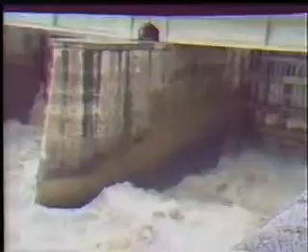Today we are going to deal with the effect of viscosity on fluid flow, and explain the basic concepts of laminar flow, turbulent flow, critical velocity, and Reynolds number, and its application in fluid flow problems.

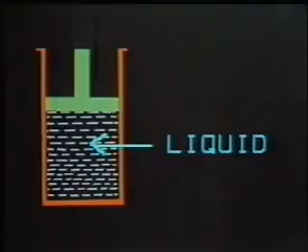All fluids existing in nature, both gases and liquids, are viscous and compressible. In the 18th century, scientists sought to specify the motion of fluids by mathematical relations, which could only be developed after certain simplifying assumptions were made. The fluid was assumed to be non-viscous and incompressible. Such a fluid, with no surface tension, was called an ideal fluid. Generally, liquids are viscous but incompressible, whereas gases are compressible with low viscosity. For example, water is incompressible, but air is compressible.

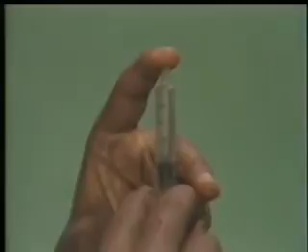Viscosity causes shear stresses in moving fluids and hence loss of energy. All real fluids resist any force tending to cause one layer to move over another. This resistance to the movement of one layer of fluid over an adjacent one is due to the viscous nature of the fluid. Viscosity is therefore defined as the property of fluids by virtue of which they resist relative motion between adjacent layers. Without viscosity of fluid, there is no fluid resistance.

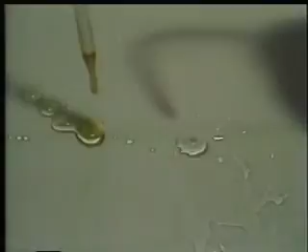Viscosity is greatly affected by temperature. Viscosity of liquids decreases with temperature, while that of gases increases with temperature. Consider this oil and water: the oil is more viscous than water.

A fluid particle in motion is subjected to viscous force, pressure force, and gravitational force.

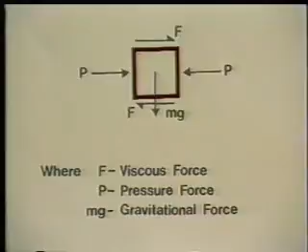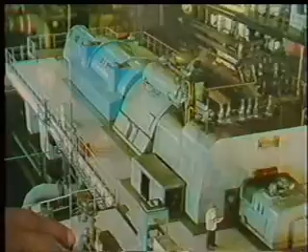Viscous forces play an important part in many fluid flow problems, such as flow in conduits, flow through porous media, the problem of lubrication, design of turbines, water distribution systems, pipe networks in chemical industry, irrigation canals, aircraft, missiles, etc.

Till the middle of the 19th century, scientists and engineers obtained much information about flow in pipes and open channels through observation and experimentation. This information was entirely empirical, because practically nothing was then known about the laws governing the influence of viscosity. Osborne Reynolds was the first to introduce viscosity as one of the parameters in the analysis of fluid flow.

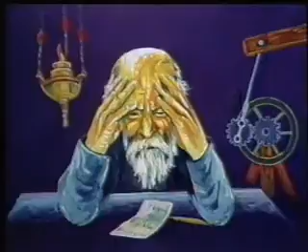Osborne Reynolds, 1842 to 1912, came from a clerical family in Belfast, and after workshop experience studied mathematics at Cambridge, where he graduated with honors. In 1868, he was appointed to the new chair of engineering at Owens College, which later became Victoria University in Manchester. He was elected a Fellow of the Royal Society in 1877, and remained active at Manchester until his retirement due to failing health.

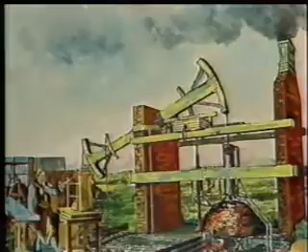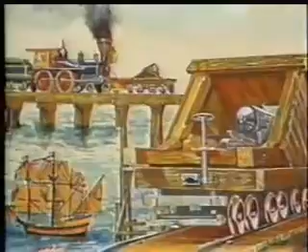Reynolds' interests were manifold, from problems in mechanics, thermodynamics, and electricity, to problems in navigation, rolling friction, and steam engine performance. Reynolds' approach to the solution of problems was primarily that of an engineer.

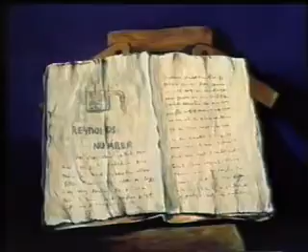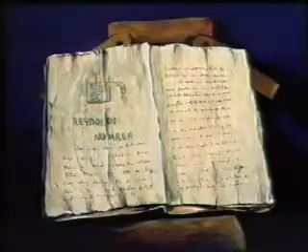While the existence of two types of flow, called laminar flow and turbulent flow, was known before Reynolds, he was the first to publish a paper, in 1883, formulating a parameter to take into account the effect of viscosity. This parameter now bears his name and is called the Reynolds number.

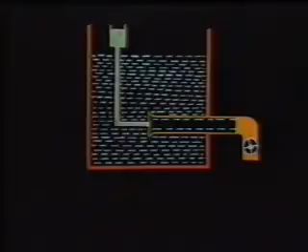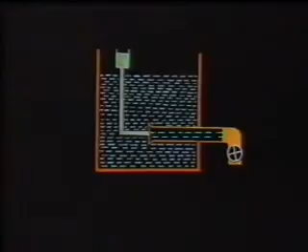The apparatus used by Reynolds for conducting experiments was basically as shown. Water from the tank could flow out along the glass tube at a rate controlled by a valve at the outlet end. A fine nozzle connected to a small container of liquid dye is used to discharge a colored filament in the flowing liquid.

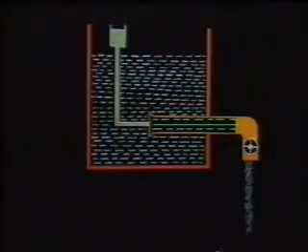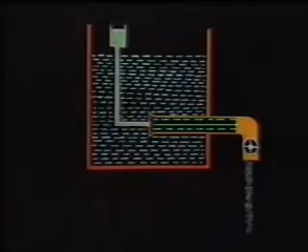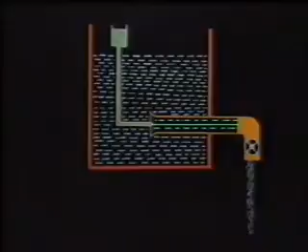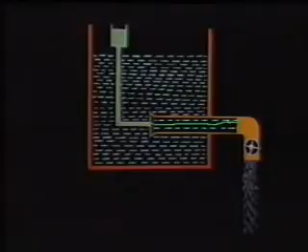If the velocity of water remained low, the filament of dye would pass down the tube without mixing with water. Such a flow was called laminar flow. As the velocity of water increased, this type of flow persisted until the velocity reached a value at which the stream of dye began to waver. Further increase in velocity made the fluctuation in the dye stream more intense, particularly towards the outlet end, until the dye no longer traveled the whole length of the tube as a distinct, unbroken thread, but suddenly mixed more or less completely with the water. Such a flow was called turbulent flow.

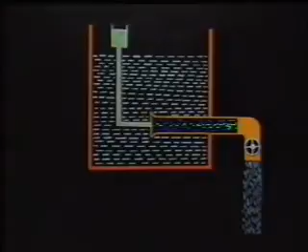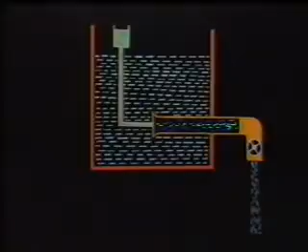Still further increase in velocity caused no alteration in the type of flow, but the dye mixed even more readily with water, and complete mixing was seen nearer the inlet end of the tube. Laminar flow, in which the dye remained as a distinct streak, could be restored by reducing the velocity. Although Reynolds used water in his original tests, subsequent experiments have shown that this phenomenon is exhibited by all fluids, gases as well as liquids. Moreover, these two types of flow can be found in all situations and are not confined to circular tubes alone.

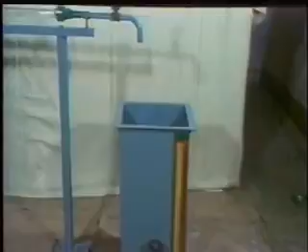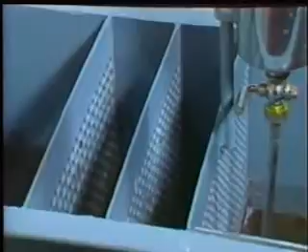Now let's go to the hydraulics laboratory to demonstrate Reynolds' experiment. This apparatus is similar to the one used by Reynolds. This is the tank containing water, and the baffle plates reduce any disturbance in the water. This is the dye container, which injects a fine jet into the stream at the bell-mouthed entrance.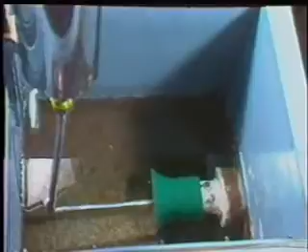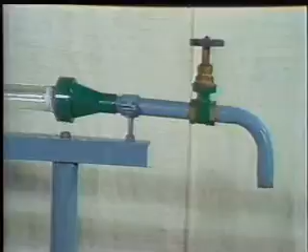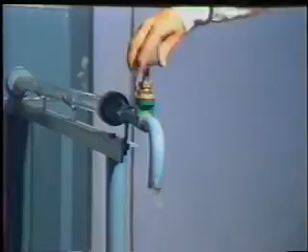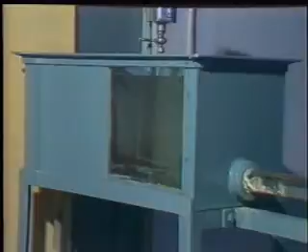The flow in the long glass tube is controlled by the outlet valve. To measure the discharge, from which velocity is computed, a measuring tank is used. The main supply valve is opened and the tank is filled with water, with the outlet of the glass tube partly open so that no air is entrapped in the tube. The outlet valve of the glass tube and the inlet valve of the tank are closed when the tank is full of water. Now we wait for some time to allow the water in the tank and glass tube to come to rest.

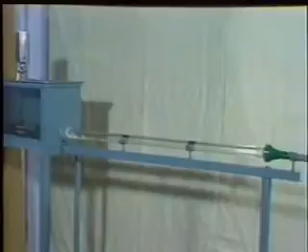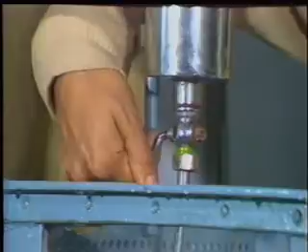Now open the outlet valve of the glass tube so that the velocity of flow is very small. Also open the dye injector so that the dye is admitted into the bell-mouthed entrance of the glass tube.

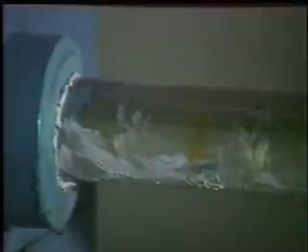We find that the dye appears as a straight line extending through the glass tube. This type of flow, in which fluid particles move in an orderly fashion, is called laminar flow, viscous flow, or streamline flow. Let's increase the velocity of flow with the help of the regulating valve.

We find that the liquid continues to flow in laminae until the velocity of flow reaches a value at which the stream of dye begins to waver towards the outlet end of the glass tube.

Further increase in velocity of water increases the fluctuations in the stream of dye until the stream of dye gets mixed up completely with water in the tube.

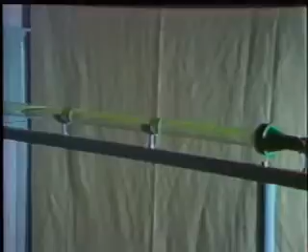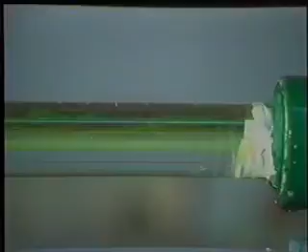Still further increase in velocity of flow does not cause alteration in the type of flow. In this type of flow, the path of individual particles of fluid are no longer straight everywhere, but are sinuous, intertwining, and crossing each other in a disorderly manner, so that a thorough mixing of fluid takes place, and such a flow is called turbulent flow.

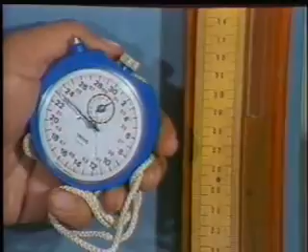Let us calculate the velocity of flow. Now, let us decrease the velocity of flow in the glass tube till the stream of dye is again visible in the glass tube.

We find that the velocity at which the change from laminar flow to turbulent flow occurs is higher than that which caused the change from turbulent to laminar flow. Reynolds called these velocities respectively the higher and lower critical velocities.

Reynolds also found that the nature of flow, that is, whether laminar or turbulent, and its relative position along a scale indicating the relative importance of turbulent to laminar tendencies, was indicated by a dimensionless parameter which is called Reynolds number.

This dimensionless parameter is given by Reynolds number equals rho L V over mu, where rho is the mean density of fluid, L is a characteristic dimension of the stream. For example, in this case, L is the inside diameter of the pipe. V is the velocity of flow, and mu is the coefficient of dynamic viscosity of fluid.

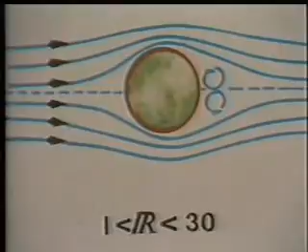More recently, however, it has been proved that the magnitude of Reynolds number at which laminar flow becomes unstable depends largely upon the nature of disturbance present in the flow.

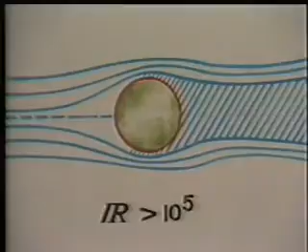For example, critical values of Reynolds number over 40,000 have since been reached with Reynolds' original equipment, largely as a result of increasing the stilling time, improving the rounding of the inlet, and eliminating all possible vibrations.

Thus, the maximum value of Reynolds number at which laminar flow is physically possible appears to be indeterminate. The disturbance necessary to produce instability simply decreases in magnitude as Reynolds number becomes larger.

For most industrial applications, the critical Reynolds number lies between 2000 to 2300. Reynolds number is applicable for all flow conditions, laminar or turbulent, where the viscous nature of fluid is considered.

Reynolds number is the principal parameter determining the nature of flow when studying the motion of bodies in a fluid of large extent, or flow of fluid around such bodies. It helps in the study of forces on tall buildings, telegraph poles, etc., due to high velocity of wind, problems of motions of automobiles,

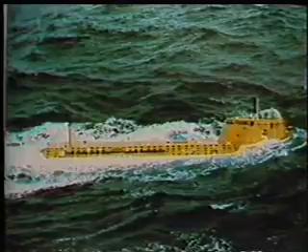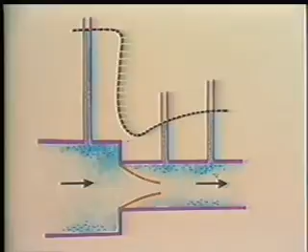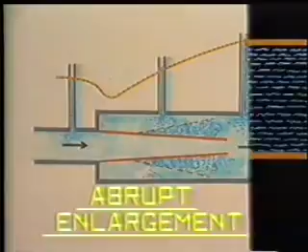aeroplanes, submarines, problem of separation, eddy formation, and lateral mixing in flow through abrupt contractions, abrupt enlargements, abrupt inlets in pipelines, and also due to abrupt obstruction in flow.

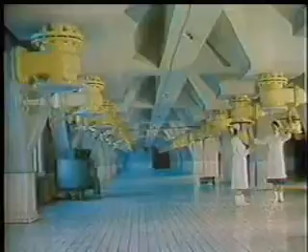Settlement of solids in a liquid, problem of heat transfer, problem of sediment transport in rivers, etc., loss of head in pipeline, problems of lubrication of machines.

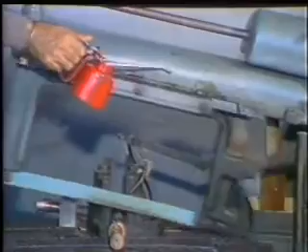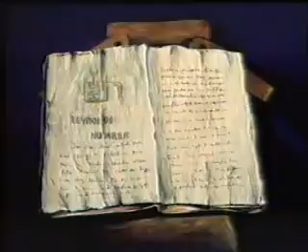Thus, to summarize, viscosity is one of the very important factors affecting the flow of fluids. It is the property of fluids by virtue of which fluids resist relative motion between adjacent layers. Osborne Reynolds formulated a parameter, now called Reynolds number, to take into account the effect of viscosity.

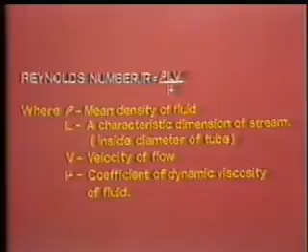Reynolds number is a dimensionless parameter and can be seen to be the ratio of inertial forces causing flow to viscous forces resisting flow, and is given by rho into L into V divided by mu. Whether the flow is laminar or turbulent is determined by the value of Reynolds number.

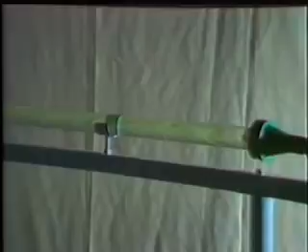At higher values of Reynolds number, the inertial forces overcome viscous forces and the flow is turbulent. But at lower values of Reynolds number, viscous forces predominate and the flow is laminar.

For Reynolds number less than 2000, the flow is always laminar. Transition from laminar flow to turbulent flow takes place for Reynolds number 2000 to 3000. For Reynolds number greater than 3000, the flow will be turbulent.

This upper critical value of Reynolds number depends largely on the nature of disturbance present in the flow. Reynolds number is an important parameter used in the analysis of fluid flow problems such as flow in conduits, flow through porous media, design of automobiles,

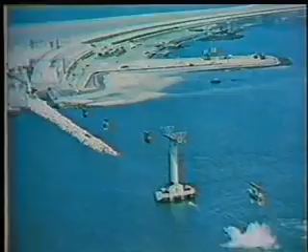aircrafts, missiles, harbors, turbines, water distribution systems, and irrigation canal.